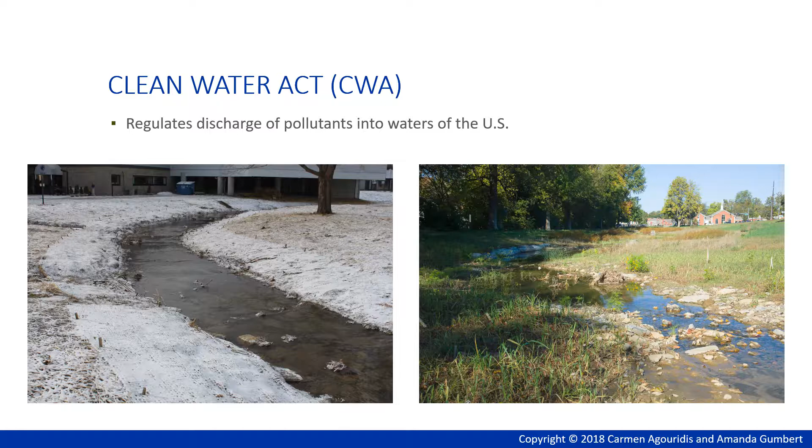Section 404 covers the discharge of dredged or fill materials into waters of the U.S. The basic premise of Section 404 permitted activities is that no practical alternative exists that is less damaging to aquatic resources. Or if significant damage would occur, then such activities should not be permitted. Thus, the permitting process promotes the avoidance and minimization of impacts. For impacts that cannot be avoided, mitigation is required.

Section 404 of the Clean Water Act is administered by the U.S. Army Corps of Engineers, who runs the day-to-day operations and issues permits related to Section 404 activities. Oversight of the Army Corps of Engineers Section 404 program is provided by the EPA. Typically, the Corps views homeowner stream enhancement and stream bank stabilization projects as good for water resources.

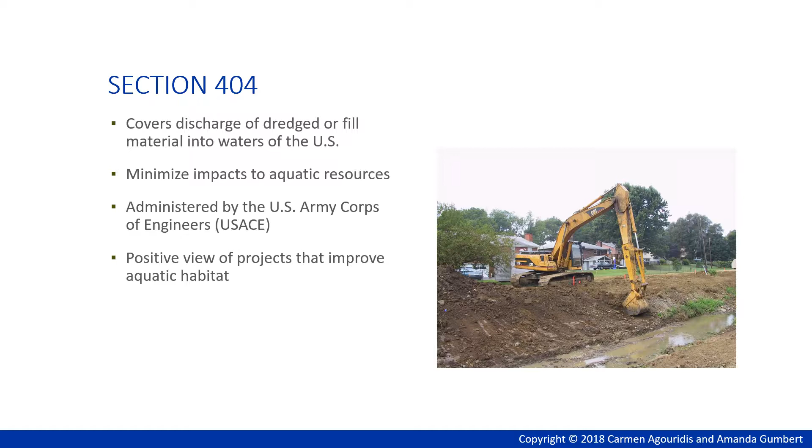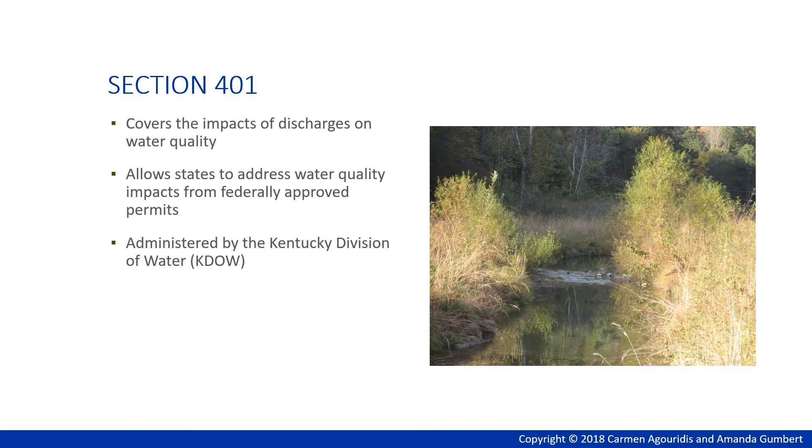Section 401 covers the impacts of discharges on quality of waters of the U.S. Section 401 provides for the protection of the physical, chemical, and biological integrity of these waters. It allows states, tribes, and the EPA to address water quality impacts resulting from federally approved permits. Thus, state and tribe water quality standards, which may be more stringent than federal ones, cannot be violated by federally permitted activities. In Kentucky, Section 401 of the Clean Water Act is administered by the Kentucky Division of Water.

First, let's examine the federal permitting process more closely. As part of the permitting process, the U.S. Army Corps of Engineers requires the completion of the Approved Jurisdictional Determination or JD form. The purpose of this form is to help the Corps of Engineers determine if the project will impact jurisdictional waters of the U.S. and thus require a permit.

Jurisdictional waters of the U.S. include traditional navigable waters as well as those waters, either tributaries or wetlands, with a significant nexus or significant connection, whether hydrologic or ecologic, to navigable waters. Non-jurisdictional waters do not require a permit from the Corps of Engineers.

Depending on the type of project, the U.S. Army Corps of Engineers will issue either a nationwide permit or an individual permit. Nationwide permits are more general permits authorizing activities that have minimal adverse impacts on the environment. Currently, there are 54 nationwide permits.

If your project does not meet the general terms of a nationwide permit or requires mitigation to compensate impacts to streams and/or wetlands, then an individual permit is required. Individual permits are commonly associated with activities that pose a larger disturbance and/or those that impact higher resource waters, such as cold aquatic habitat, outstanding state resource waters, reference-reach streams, and the like.

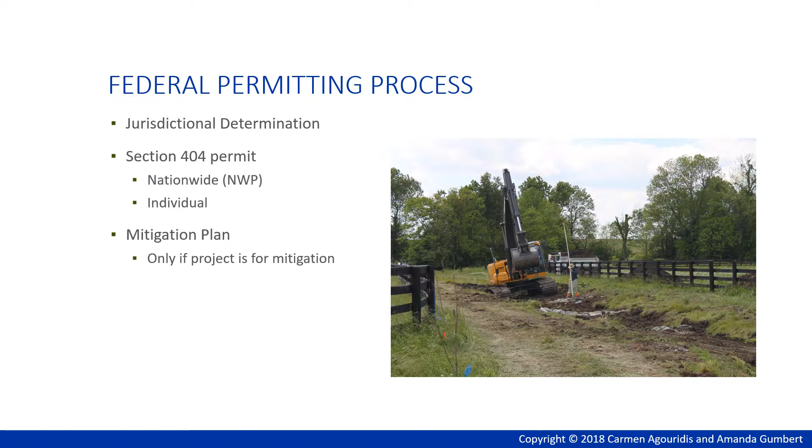There are 2 nationwide permits of importance for stream bank stabilization and restoration projects. The first is a nationwide 27 permit, which authorizes aquatic habitat restoration, establishment, and enhancement activities. This nationwide permit covers the majority of stream restoration activities. The second is a nationwide 13 permit, which authorizes stream bank stabilization.

A nationwide 13 differs from a nationwide 27 in that the work is occurring above the ordinary high water mark, meaning bankful elevation. It also means that channel realignment will not occur. If your project involves working only along the stream bank, meaning equipment will not enter the stream, a nationwide 13 permit would likely be appropriate.

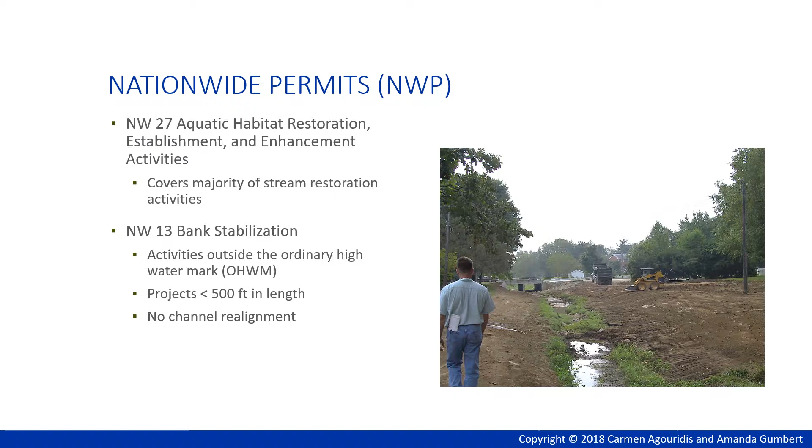In addition to federal permitting, states have their own permitting requirements. States have oversight over the federal program covering Section 404 of the Clean Water Act through permit requirements related to Section 401 of the Clean Water Act. In Kentucky, the Kentucky Division of Water must issue a 401 water quality certification for the U.S. Army Corps of Engineers 404 permit to be valid.

In addition to the 401 water quality certification, 2 additional permits are required: permit to construct across or along a stream and Kentucky Pollutant Discharge Elimination System General Stormwater Permit. The permit to construct across or along a stream is for floodplain management, and as such, your application must receive approval from the local floodplain coordinator before it will be reviewed by the state. The goal of the permit is largely to ensure that your project will not increase flooding upstream or downstream of the project.

Lastly, if your project is large enough, the state requires that you obtain a Kentucky Pollutant Discharge Elimination System, or KPDES, General Stormwater Permit. Stream permits may require engineering or survey data. This certified information should be provided by the applicant when completing the state permit applications.

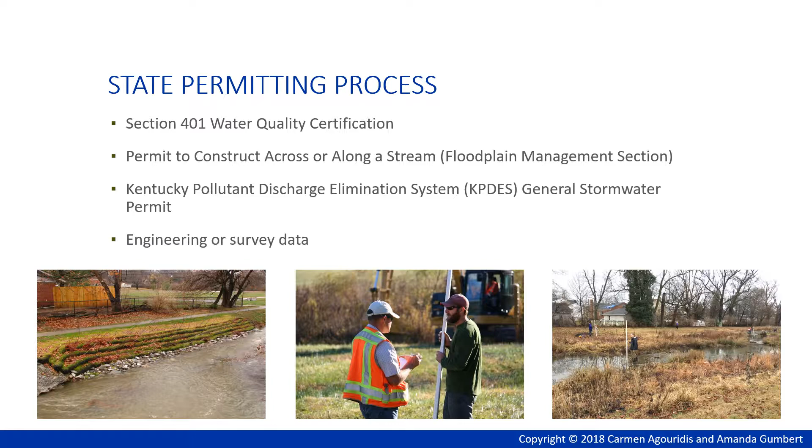Review and authorization of Section 404 permits at the state level is done through the Water Quality Certification Permit. The goal of the permit is to minimize impacts of discharging dredged or fill materials on the quality of Kentucky's waters. Much of the information used to complete the U.S. Army Corps of Engineers Section 404 permit can be used to complete the paperwork for the Section 401 Water Quality Certification Permit and the permit to construct across and along a stream.

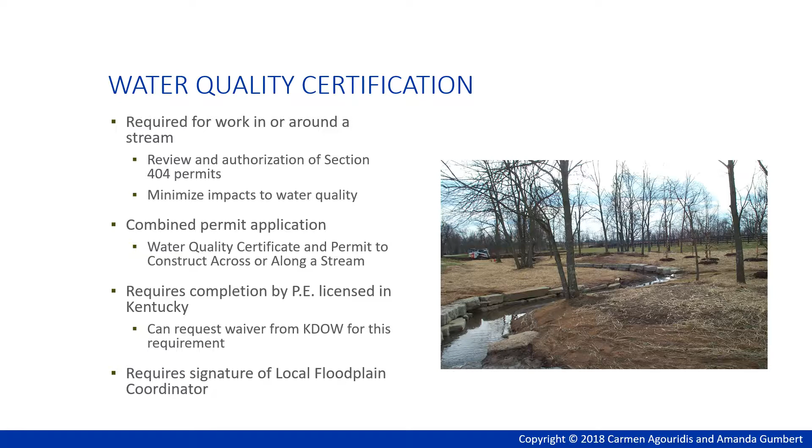In Kentucky, both state permits use the same application except when an individual water quality certification is needed. If such is the case, then an additional form must be completed. Unlike the federal permit applications for a 404 permit, the water quality certification and permit to construct across or along a stream permits require completion by a licensed professional engineer unless the Kentucky Division of Water grants a waiver. Additionally, this permit application requires the signature of the local floodplain coordinator before the Kentucky Division of Water will review it.

The Kentucky Division of Water regulates any development along or across a stream with a drainage area of 1 square mile or greater. Examples of such activities include bridges, culverts, stream restoration projects, placement of fill material, and buildings.

The permit to construct across or along a stream is the floodplain management portion of the permitting process. This permit is required for all activities that occur within the 100-year floodplain. Because streams and floodplains are interconnected, this permit is combined into one form with the water quality certification permit.

With the permit to construct across or along a stream, it is important to demonstrate that your project will not adversely impact adjacent property owners by causing upstream or downstream flooding.

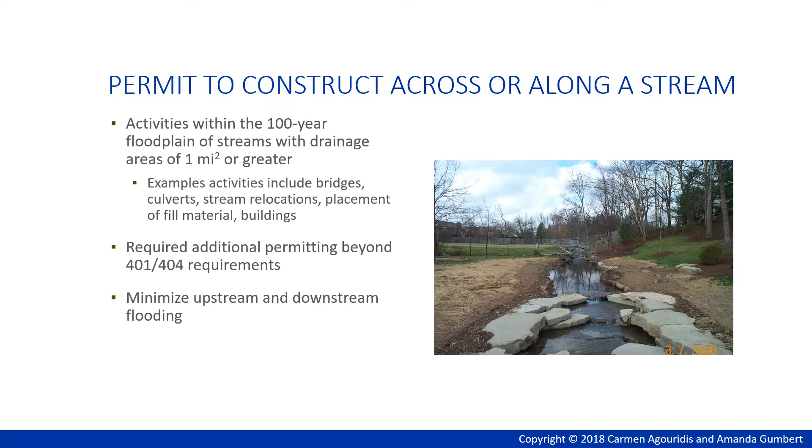The Kentucky Pollutant Discharge Elimination System, or KPDES, General Stormwater Permit focuses on how you will manage stormwater from your project site such that it does not negatively impact water quality. A KPDES General Stormwater Permit is required if your project will disturb 1 acre or more of land.

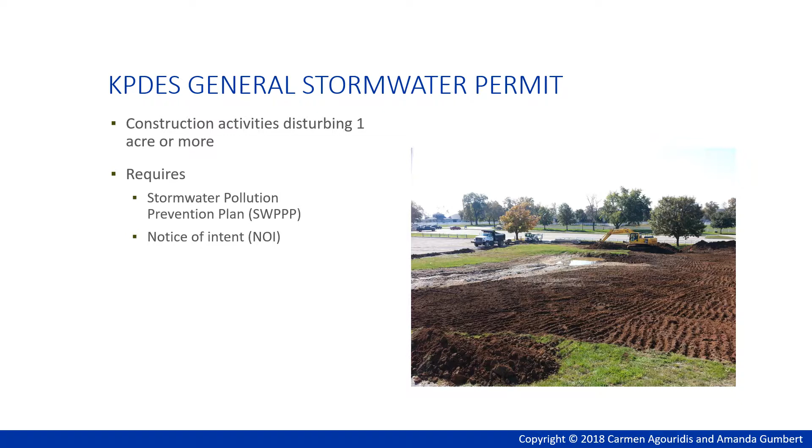Sediment is one of the largest pollutants, especially during construction activities, so it is important that you address how to prevent the transport of sediment into streams while the project is under construction through the development of a stormwater pollution prevention plan. You must also complete a notice of intent electronically at least 1 week before the commencement of construction activities.

Once federal and state permits are obtained, a local permit must be obtained from the floodplain coordinator in your community. It's important to note that the local floodplain coordinator may be the sole job of one individual or could be one part of an individual's job, depending on the community. Some communities may have higher standards for flood protection than federal and state guidelines specify.

If you are in Lexington, an LFUCG land disturbance permit and erosion sediment control plan is required. The erosion sediment control plan is a stormwater prevention plan that is part of the KPDES General Stormwater Permit. Before the LFUCG land disturbance permit can be issued, a representative from LFUCG must visit the site to review your sediment and erosion control measures.

Another example is LFUCG's riparian buffer permit. This permit is for property owners who desire to create a buffer area around streams, wetlands, ponds, or the like. It is issued by LFUCG's Division of Environmental Services.

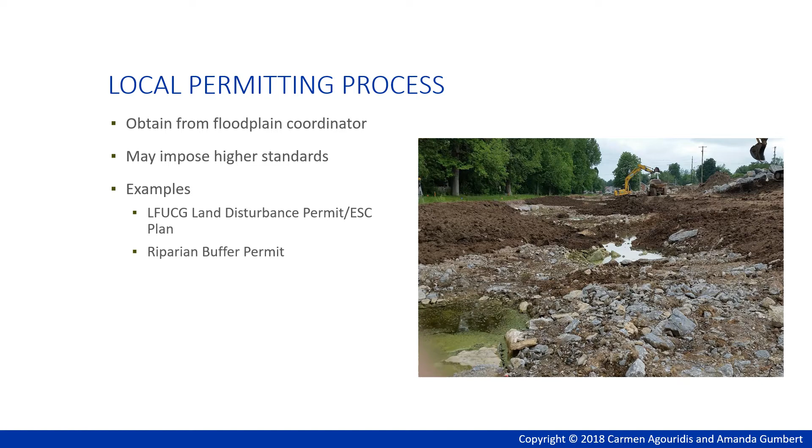Once you have received any needed permits, it is very important that you read the conditions or terms of the permits to ensure you are in compliance at all times. If you have any questions, it is important to clarify those before you begin construction. If changes are needed to the project during construction, be sure to notify the agencies who issued the permits.

One common condition of permits is a pre-construction notification. Notify all involved agencies of the intended construction start date. Typically, written notification is given 2 weeks prior to the start of construction. Such notification provides agency personnel with the opportunity to come visit the project through the construction phase if desired.

Finally, be sure to keep a copy of all permits on site in a waterproof container in case a representative from one of the permitting agencies visits the project site and would like to see the paperwork.

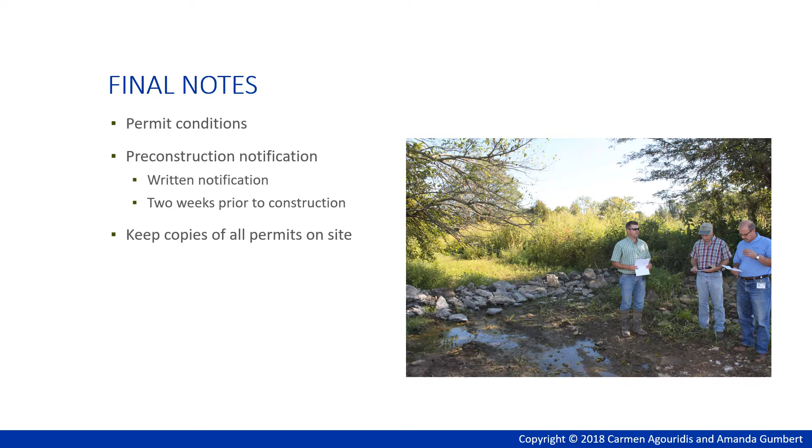In summary, when planning a project involving streams and riparian areas, it is important to be aware of and obtain any necessary permits. As the permitting process is complicated, it is best to start locally. Local representatives, such as your community's floodplain coordinator, can help you navigate the permitting process at all levels. When conducting stream bank stabilization and/or enhancement projects, permits at the federal, state, and local levels may be needed.